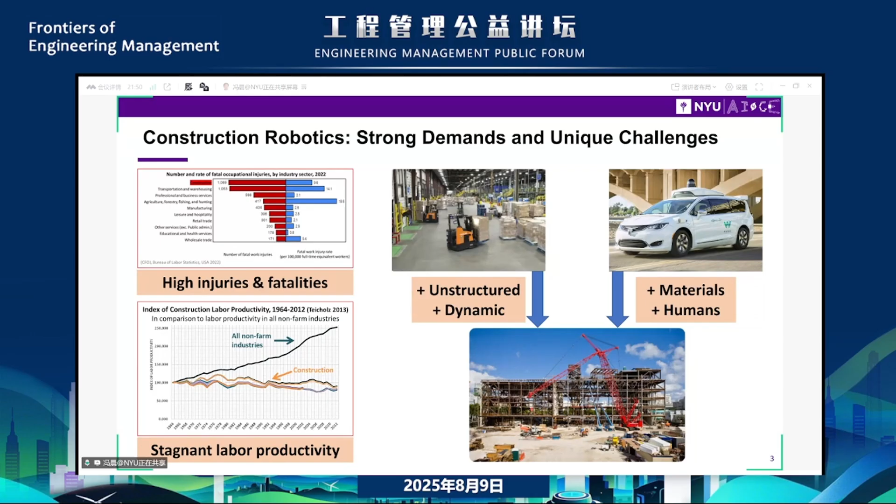So fundamental research is required for construction robots. We cannot just think about applying existing techniques in automation and robotics or machine learning or even AI to magically solve problems that we face in construction and engineering management. So let me illustrate some of the more specific technical challenges faced by construction folks when we try to bring automation and robotics onto the site. The first one is the so-called constantly changing job sites, right?

So this is a data set and a challenge hosted by the Stanford civil engineering department. They call this the Nothing Stands Still challenge. Basically they go to a construction job site and scan it in 3D in great detail almost every week. And then you notice nothing stands still in a construction site, right? Things change every week, if not every day. And this brings a lot of challenges to robotics, as we will discuss later.

Another thing specific to construction is that you typically face great difficulties in localizing and navigating agents, including autonomous equipment or even construction workers. Because a lot of the construction site, when it is being built, is featureless. It has many repetitive structures, and it is difficult for even humans to know where they are if they're not familiar with the site, especially when the site gets large and complicated.

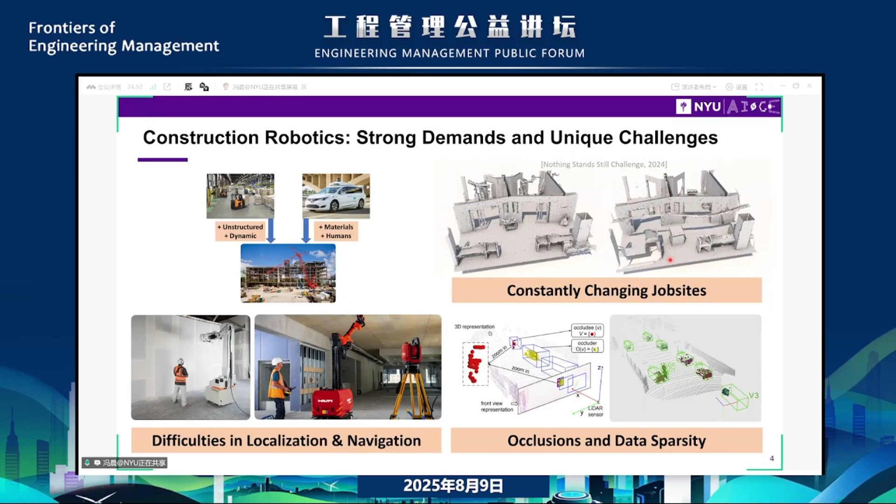So not to mention we want to use this technique to make the site more safe. Now, if you cannot address these technical challenges, you're actually bringing more danger into the construction site. So basically, we're saying construction vehicles are becoming autonomous these days. As you can see on the image here, this is not just happening in academia. It's happening in the field, in those heavy equipment manufacturers. Companies like Volvo, Boston Dynamics, different kinds of construction heavy equipment manufacturers. Even in China, I know companies like Xugong and Sany Zhonggong, they are all investing in this autonomous equipment technology, right?

So basically, in robotics terms, we can call these construction vehicles or equipment mobile manipulators. These mobile manipulators need to finish one task, regardless of the different specific construction jobs they have to perform. From a fundamental robotics perspective, they all need to perform simultaneous navigation and environment modification. So they need to move in order to perform their jobs. Unlike in manufacturing, you can rarely have a robotic arm that's fixed at one place and just does work waiting for things to be transported to the vicinity of that arm. The robot actually has to move around, and while moving around, they have to make modifications of their environment. So this is what we call a mobile manipulator in robotics.

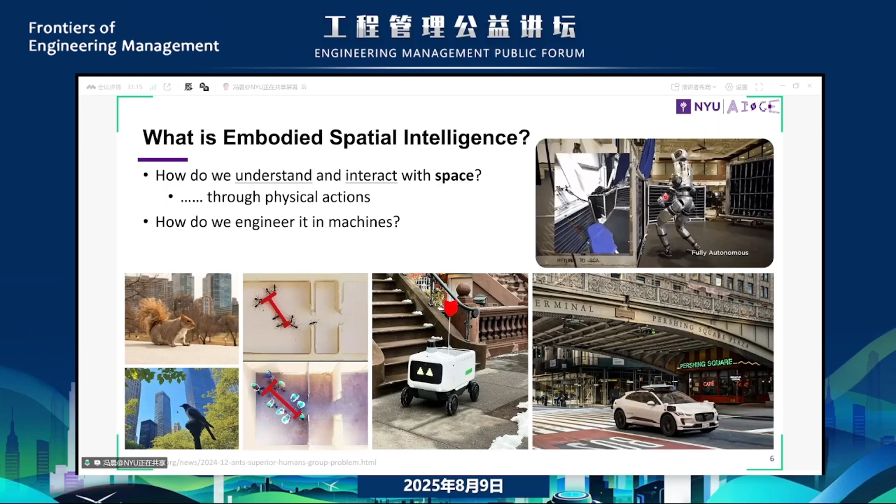Even humans need to try multiple times, and believe it or not, we are not more efficient than ants, right? So this is very interesting. But most importantly, to the interest of construction folks, we want to engineer those capabilities back in machines. So not only do we want to achieve autonomous vehicles or autonomous delivery systems, material handling systems, we want them also to be able to interact and move objects, work in factories and construction sites.

Now, talking about this, you probably will think, how far are we from engineering such intelligence, given all the great excitement and progress in the broad field of AI, artificial intelligence. Especially yesterday, GPT-5 was released, right? So here I want to quote from some famous experts that are known to the general public.

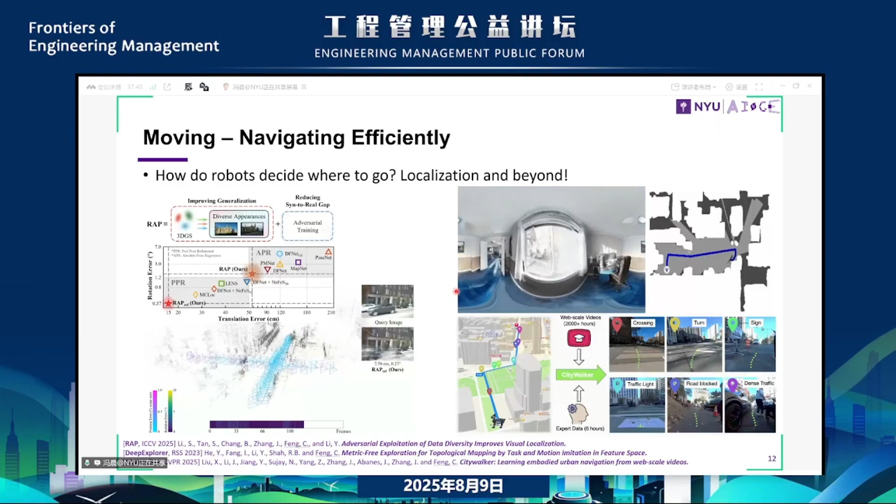The robot could be a self-driving car. It could also be an excavator on a job site, right? So they need to understand the surrounding situation. What is happening? Is there any signal that prevents me from doing certain actions? When can I move across this field in front of me, and when can I not? So all these are beyond localization. They're decision-making problems.

Of course, the things that are most interesting and most useful to construction folks are the making part, right? We actually need to enable these autonomous machines to build in the physical world, in addition to localizing and moving themselves like self-driving cars do. They actually need to move and do things and make things happen, right? So the animation is from the well-known WALL-E movie. I'm sure many of you or your kids have watched this before.

But I want to remind you of the amazing capability of Mother Nature. So here is a termite mound that people found in Africa, right? And I'm sure you can find similar structures in other parts of the world. So if you think about animal architects, this includes termites, but beyond termites, they can build structures. This is an amazing capability.

Even nowadays, after thousands of years of technology updates in construction, we still don't have an autonomous system that can do this kind of, quote unquote, simple task that even a termite or ant can do, right? So that means there are some theoretical challenges that fundamentally lie beneath these applications.

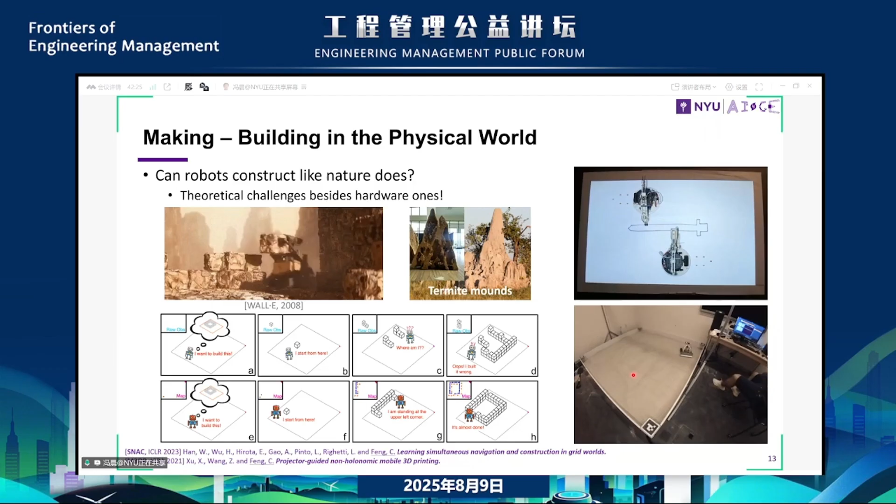On the bottom, we're showing construction like autonomous terrain grading experiments happening in our lab. This is an ongoing project, and we're hoping that researching these kinds of topics will one day enable robots to go to extraterrestrial conditions like the Moon or Mars to build bases for us. Right? So this is the making part.

And this is, of course, more than just the monkeys. We see these behaviors in ants, we see these behaviors in birds, many animals, right? So this inspires us to think, how can we enable autonomous agents like robots or construction equipment to work together so they can see and act better, right?

So my group has actually pioneered in this direction and developed a research subfield called co-perception, or collaborative or cooperative perception. Okay, so due to the lack of data on the construction side, we started by collaborating with researchers in transportation. So in transportation, we already have the possibility to either simulate or collect real-world multi-agent interaction data where you have vehicles near each other, all equipped with sensors, and they can talk and communicate with each other.

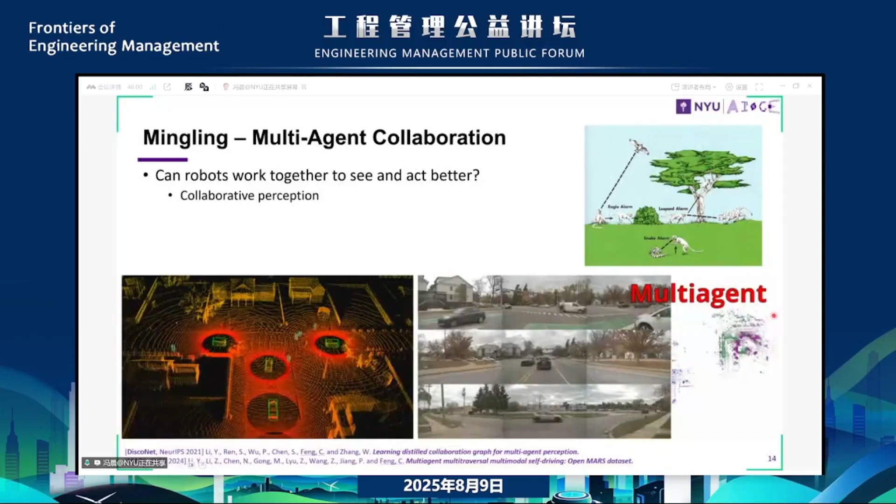So I know that we have about 40 minutes in terms of the presentation. So I actually have more details for any of these keywords. Depending on the audience interest, I can go deeper into any one of them. But maybe in the interest of time, because Professor Mao told me that I should finish this in about 40 minutes, so that we have... You don't worry about that. You can give more detail for this. Okay, yeah, not a problem. So then I will have a lot more time. I will still have about 20 minutes, so I can go into more details. And it really depends on the interest of the audience. I can go faster or slower in any one of those topics.

All right, so maybe let me talk about the mapping first. So for many colleagues working in engineering management, you're not unfamiliar with the term point cloud. Many times you actually need to go out to your job site and take your favorite terrestrial laser scanners, sit them on a tripod and let them scan the environment at different locations of the job site, and eventually you need to perform this registration task, which is what we call mapping or point cloud mapping.

And this is the mathematical summarization of the point cloud mapping problem. You don't really need to worry about it, I don't want to put you to sleep on a Saturday night, but what I want you to know is this problem is not unique to construction.

Even in autonomous driving, we need to solve the exact same problem where you have cars moving around in the city, and they scan the local geometry at their own pose at different times, and eventually they need to take all these scans together and build a map of the entire city. This is no different from a construction site point cloud registration problem, okay?

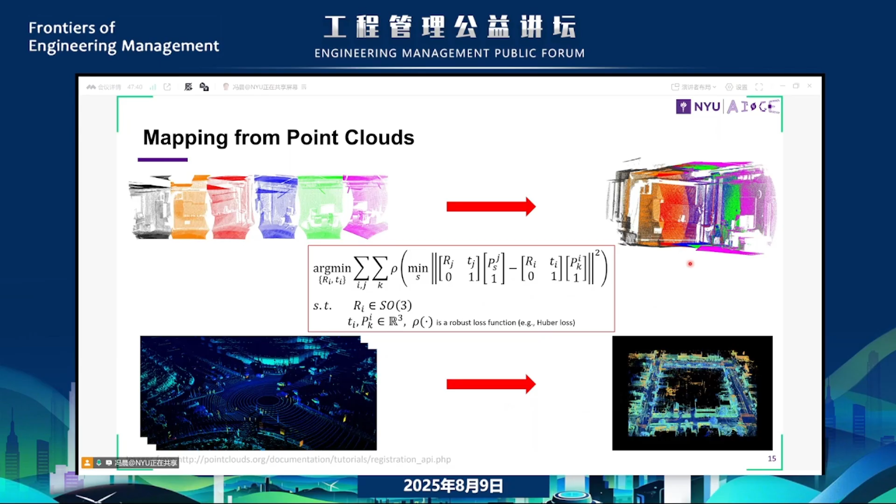So in the mapping part, my group has done some work that tries to make this process more efficient and less labor intensive, even though I know this field has grown rapidly, and with the latest service or software that you may get from companies like Leica or Trimble, the process is already much smoother than before. But still, if you're talking about scanning a site, giving all the data to the software and letting it automatically register all the point clouds without any human attendance, I believe we still cannot do that 100% nowadays. You may always run into issues here and there that require some human attendance, right?

So in order to make this whole thing as autonomous as possible, because again, as construction engineers or project managers, we don't really care about the fundamental technology. What we want is a fast scan and understanding of the current status of the job site, and to do any quantitative work as soon as possible.

So basically, we developed this work called DeepMapping2, which is one of the most accurate metric mapping systems, and it can take all the point clouds you scan, no matter whether this is done by an autonomous driving car or a job site scanning robot, and it will autonomously register them. As you see here, we're plotting the sensor pose in each frame, and this is a city-scale scan, and it will automatically register all the poses so that eventually they align very accurately.

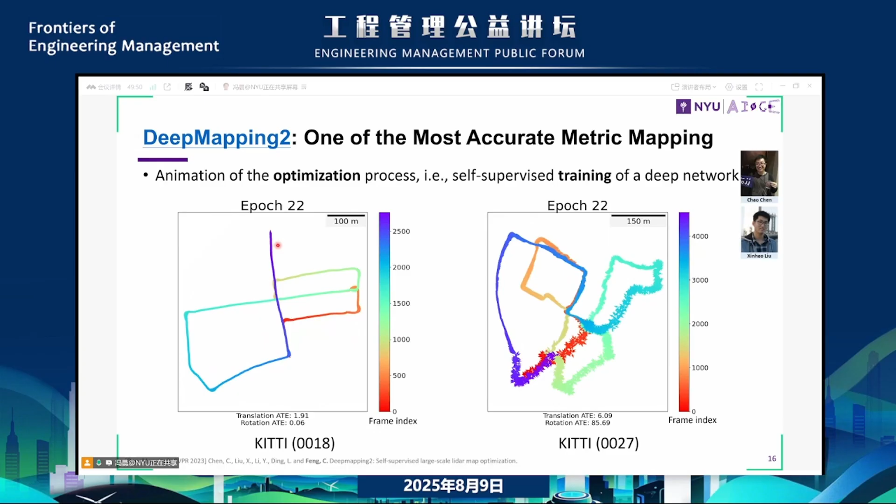And here, this sensor pose shows the structure of a street of a city, right? So you see from the beginning it is very noisy, and eventually the system converges without any human attendance at a city scale, autonomously. And here it shows both the trajectory of the sensor and the scanned laser points projected onto a 2D plane. And we show that our system is very close to the ground truth, the high-accuracy ground truth that even requires some human attendance to build.

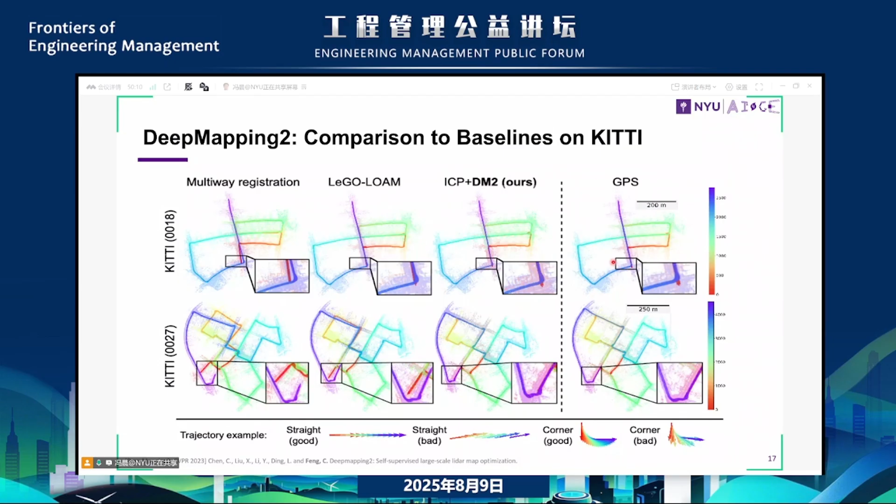So in the interest of time, I will skip the technical details. Again, I don't want to put you to sleep on a Saturday evening.

So the important thing is we developed an AI system, or basically a deep neural network, and we make this problem equivalent to training that deep neural network. So by training that deep neural network, the problem gets solved. So we don't even need to deploy this trained neural network later. Just training the network itself is equivalent to the mapping problem. And then we can leverage all the good techniques in AI to make this problem autonomous.

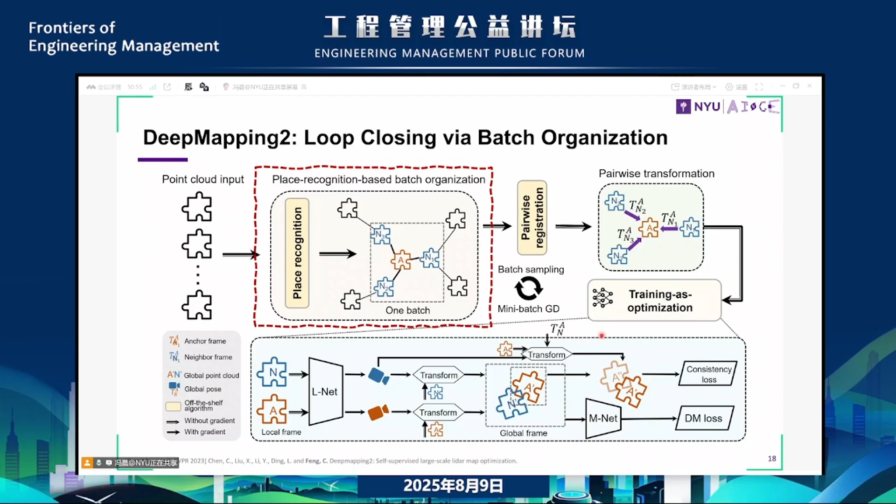Okay? So we can do mapping not only from point clouds, but also from images. This is typically lower cost because laser scanners are still pretty expensive, and they're often bulky and heavy. If you have a pocket camera like your cell phone or a 360 camera, you can very easily walk around the job site, and then you wonder if you can build a map from those images. This is a very well-known problem called the structure from motion problem in computer vision and robotics. In robotics, we call this visual SLAM.

So there are different ways people perform traditional SFM, or more recently, people use neural networks to do learning-based metric mapping or learning-based topological mapping. And here, for those who have the mind of a theoretician, you may be interested in this very abstract mathematical form that summarizes all the mapping-from-images problems. But for practitioners, here is something that may be of interest to you.

This is a work that we published 2 years ago at CVPR, one of the top AI conferences, named VoxFormer, which is a camera-based 3D semantic scene completion problem. It was originally popularized by the company Tesla in the year 2022. And basically what this problem is, when we have a camera moving in the environment, we want to develop some kind of end-to-end learning-based AI system that will generate this kind of

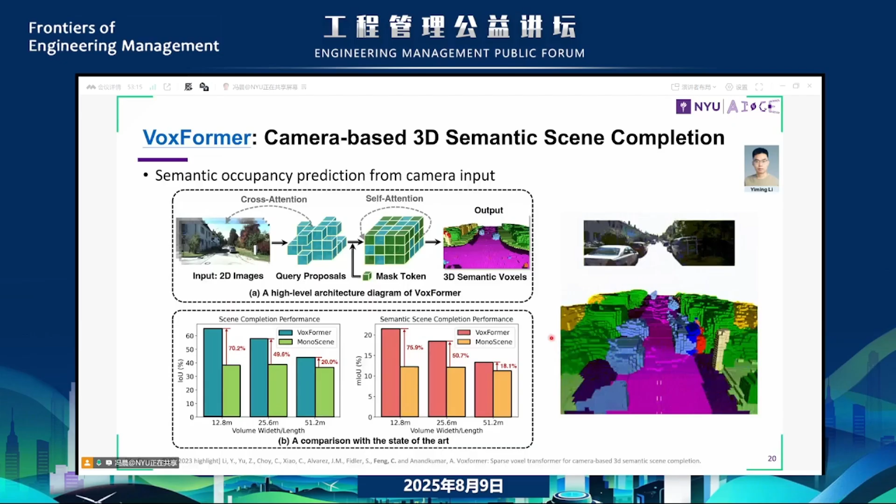So this is a very interesting and challenging problem, and we were able to achieve the SOTA at that time by developing a novel transformer-based neural network architecture that generates results from this single-view image that match very closely to the ground truth data, whereas the previous baselines all make more mistakes. Okay.

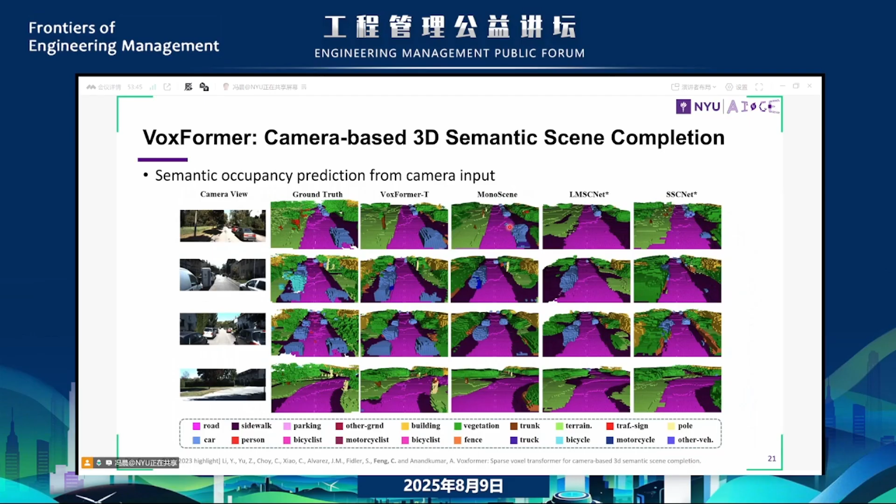So we can also go beyond metric mapping, as I mentioned. The multi-view scene graph work that our group published last year is a representation of the so-called topological scene representation. And the reason that we want to develop methods in addition to metric mapping is the metric mapping.

For those of you who have used terrestrial laser scanners, you would know if the scene changed during your scan, it can create a lot of problems, not only for the registration of multiple point cloud scans, but also problems of recognition, like later on you need to figure out where this thing is, which thing happened first and last, and how to register a new scan into the existing scan where the scene has already changed significantly.

So if we move beyond the metric mapping requirement, which requires us to build a global map that is metrically accurate everywhere, we can relax that condition by saying we just need to build a graph that preserves the topological connectivity information among those images or the objects in those images. Then we can more quickly and easily maintain such a graph even if there are changes in the environment.

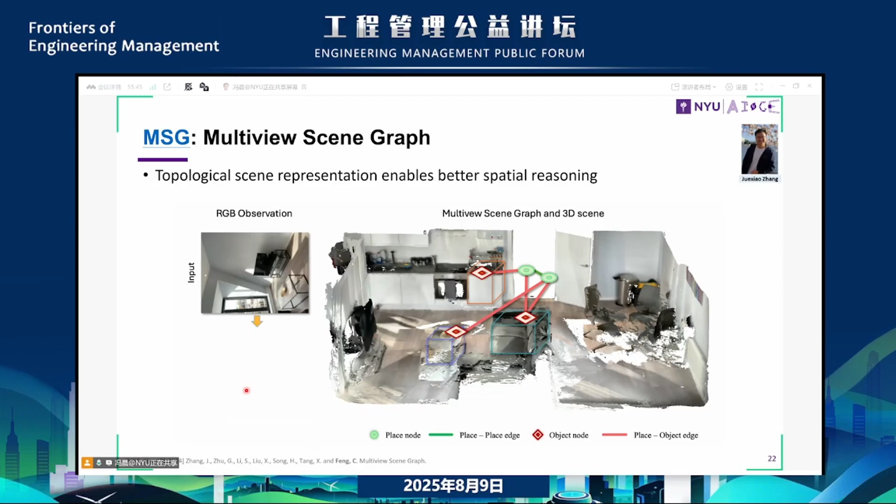Because if there are any changes in the environment, we just need to replace that image, remove the corresponding object node, and replace it with the new image and the new object inside it, right? So this is the fundamental idea of the topological representation beyond metric mapping. And this kind of representation will be super useful for tasks like asset management. For those of you who have managed mega projects, you would know how challenging it could be if the job site's assets are not properly managed.

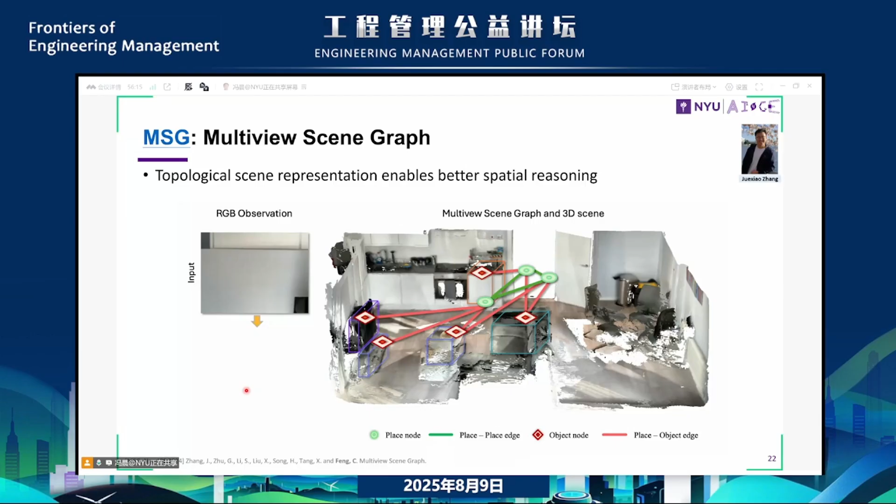You would constantly face problems of the need of finding a particular useful and unique asset, where it is and who used it last. And we believe this kind of topological mapping is a very flexible and robust way of addressing that problem. And here are just some of the applications that can be enabled by this kind of topological map.

For example, the embodied question answering application of the topological maps is a great example of resolving the asset management challenge. When you build such a topological map of the environment from the surveillance video you have of the site, then, just like how you interact with GPT, you can ask questions to such a model. Where is which object? What's the last time you saw that object?

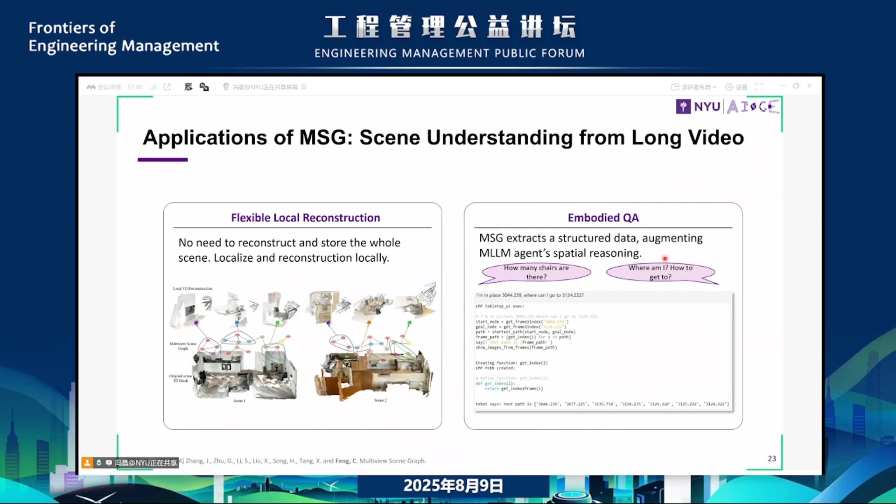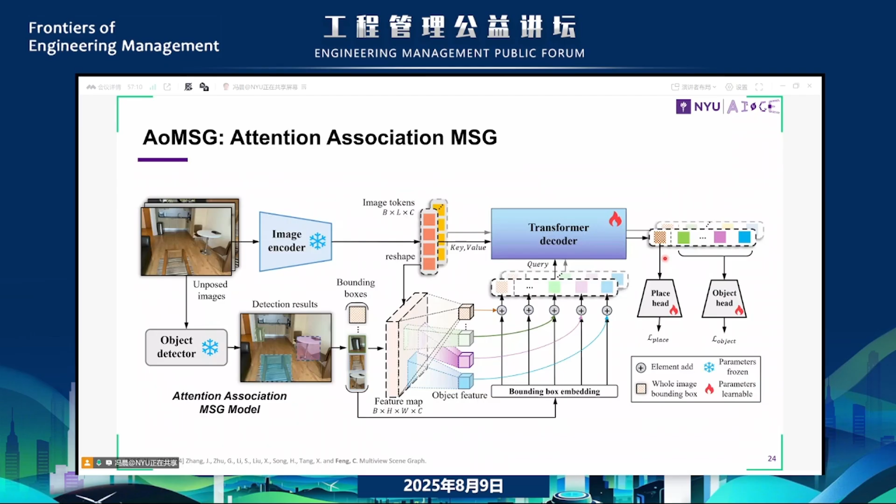I will skip the technical details of how we implement such an AI system. But I want to move on to the next keyword, moving, with a bit more detail. We want to teach a robot how to move, or basically how to navigate an environment. One example that can be useful for construction, especially in the operational phase, is the exploration problem: in a new environment the robot has never been to before, how do you autonomously navigate this robot so that it can explore every single aspect of this environment without human attendance?

Again, if a building manager, when first taking charge of a building, can just send a robot dog that autonomously goes everywhere, then they can leverage the information collected by this robot to build the maps we talked about before. But before that, you have to solve the problem of how to tell the robot to go to all the places in this building. Because remember, this is a new place the robot has never been to, and you don't have a map, right?

So maybe you have a BIM, but the BIM never has the actual condition. They're always as designed. The as-built BIM, as far as I know, is still far from being implemented in the real world. And even if implemented, they don't have the real-world conditions, the real-world texture, real-world details. So it will still be good for a robot to be able to autonomously navigate and explore such an environment without missing any key places.

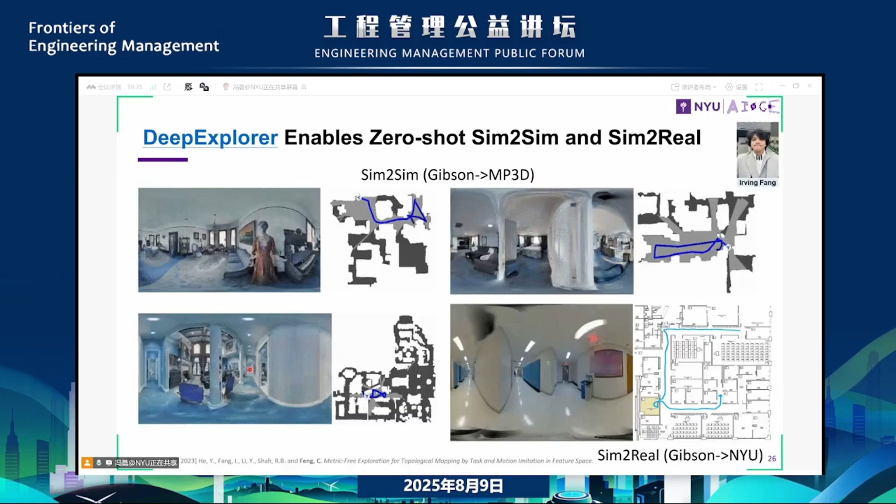This slide shows something called DeepExplorer that we published two years ago at a top robotics conference called RSS, Robotics: Science and Systems, where we enable this robot equipped with only one 360 camera. These are equirectangular images captured by a 360 camera, so you get the surround view very easily with only this one sensor, without relying on more complicated sensors like LiDAR.

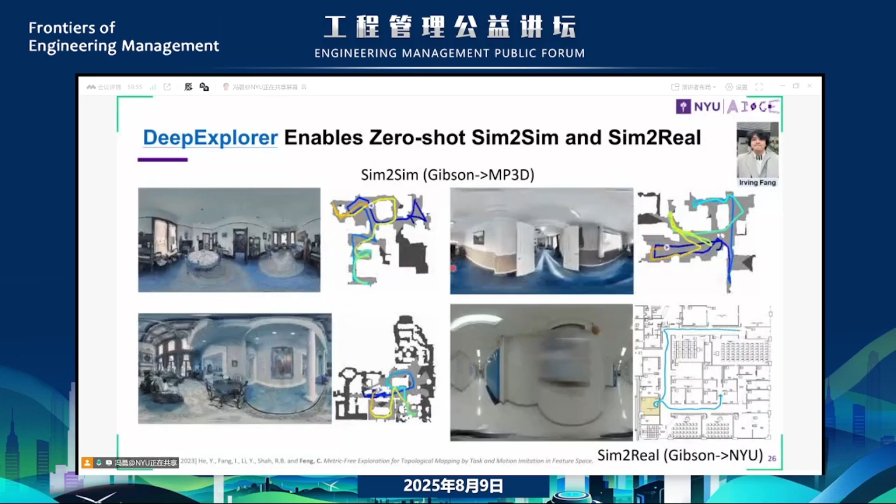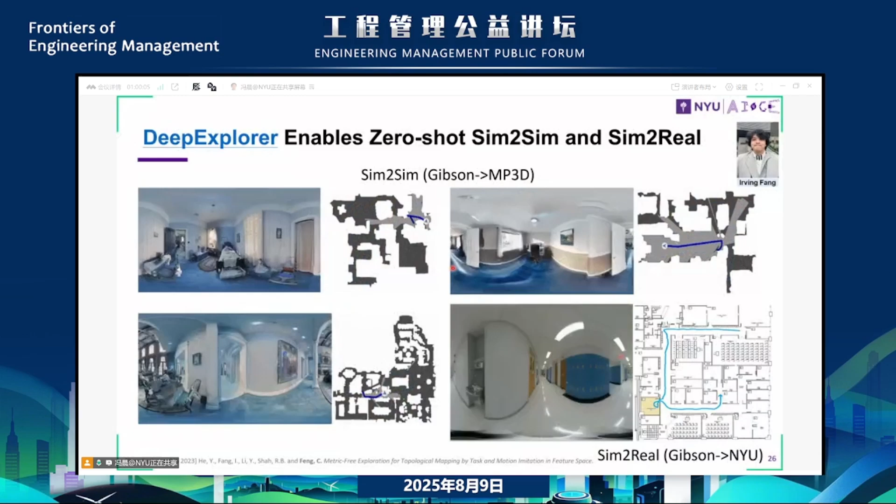We developed a system that, just like humans do, can autonomously navigate an environment by memorizing which places it has already visited. Therefore it doesn't require much revisiting, so it can spend more time on the unexplored, unfamiliar regions. We were able to train this whole system in a simulated environment and then deploy it in a completely different real-world environment. In this animation, you're seeing an actual real-world deployment in our university building.

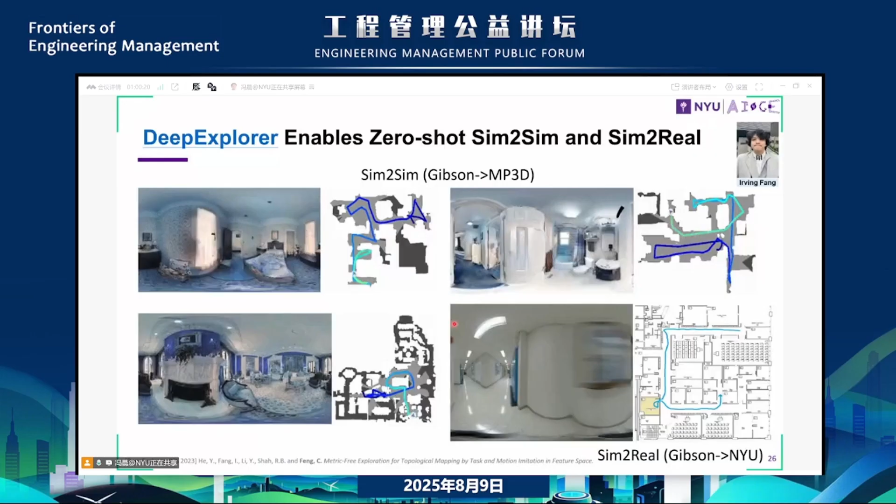I will again skip the technical details of how we achieve this. The key is to develop a neural network architecture that addresses both the high-level task planning and the low-level motion planning through imitation learning, so that it imitates oracle experts to perform this task and eventually is able to autonomously explore the environment.

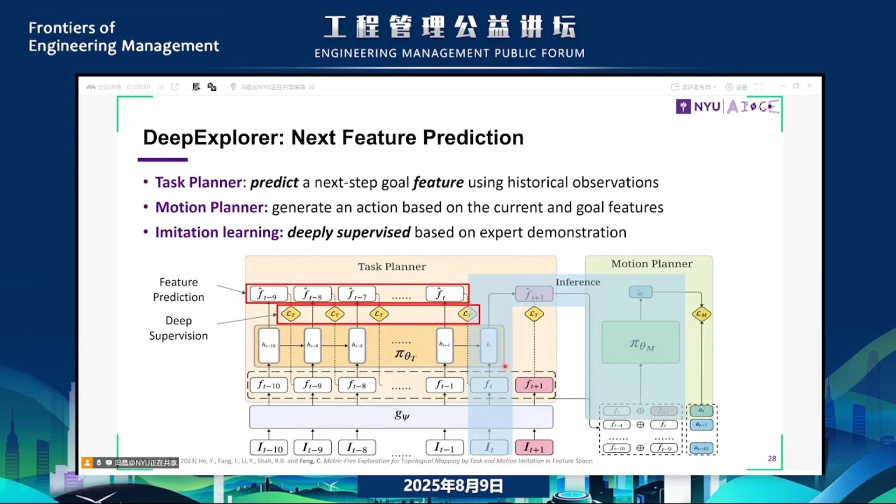I want to highlight a recent work called CityWalker from my group this year, published at CVPR, using web-scale videos for urban navigation. We believe if we can resolve urban navigation problems, such as navigating a robot dog from NYU to Columbia without any human attendance, relying only on information available to a general human being, like a cell phone and Google Maps, then it is easier for us to bring a robot to a construction job site, because many problems in urban navigation are similar to a construction site. You face a dynamic environment, dense traffic, different construction conditions, right?

But the key to such embodied AI is always the data. Where do you get the data? We never had large enough robot dog navigation recordings available to researchers or to anyone in the company.

And what we are able to do is we say we can leverage the thousands of hours of videos people posted on YouTube that include either humans holding a camera walking in different kinds of cities, or driving in different kinds of cities. So we curate over 2,000 hours of YouTube videos that show very different, very dynamic situations at different seasons and weather conditions. And then we're able to develop scalable AI systems that can consume this data and learn implicitly all the rules that humans follow either walking or driving in those environments.

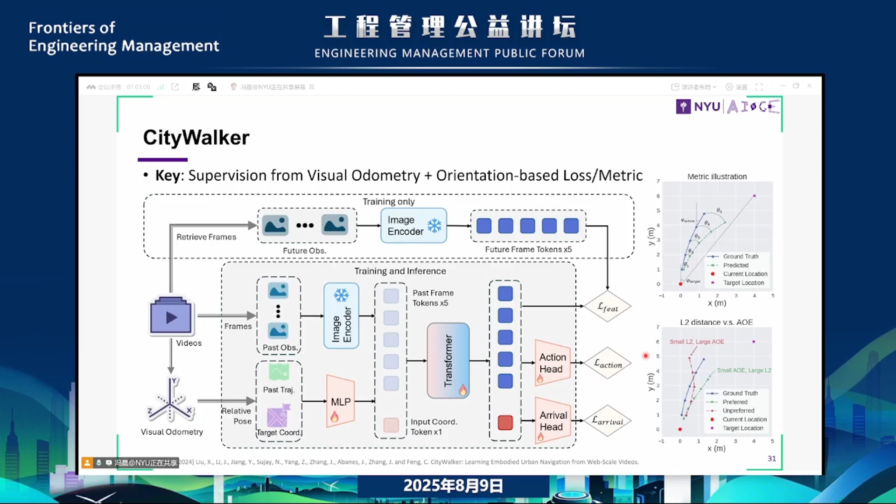And then, very interestingly, we're able to discover the scaling law. So without changing the neural network architecture, by just increasing the training data from a couple hundred hours to a couple thousand hours, we notice the error decrease, or basically performance increase, which shows this scaling law. And we also show that by including different modalities, we also improve the performance. So even if your task is to walk, if you have watched enough driving videos, it will help you walk as well. So these are all very interesting discoveries.

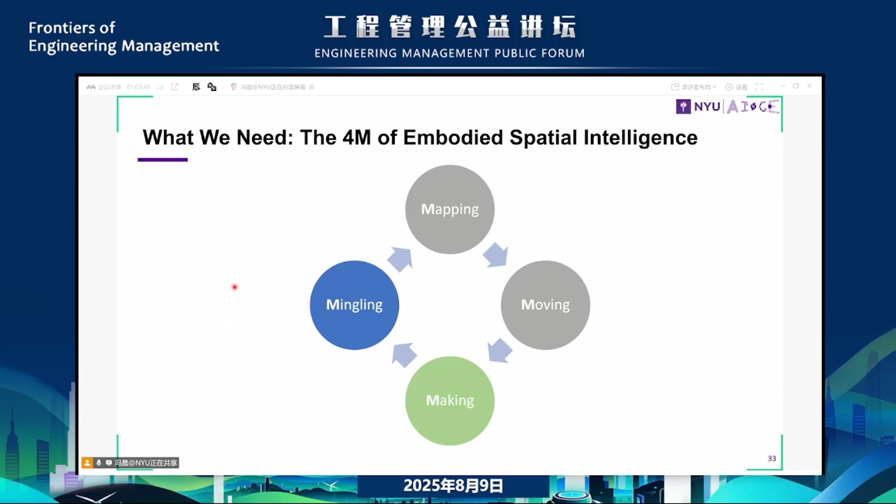So let me see. I want to skip some of these later slides. This really shows our work on using AI to teach robots how to do things without requiring the human to ever know robot programming. So we essentially use a vision language model to translate a video into robot code that makes robot programming easier. And we think this is important for industries like construction and manufacturing, so that we don't really require robotics experts to program things for us.

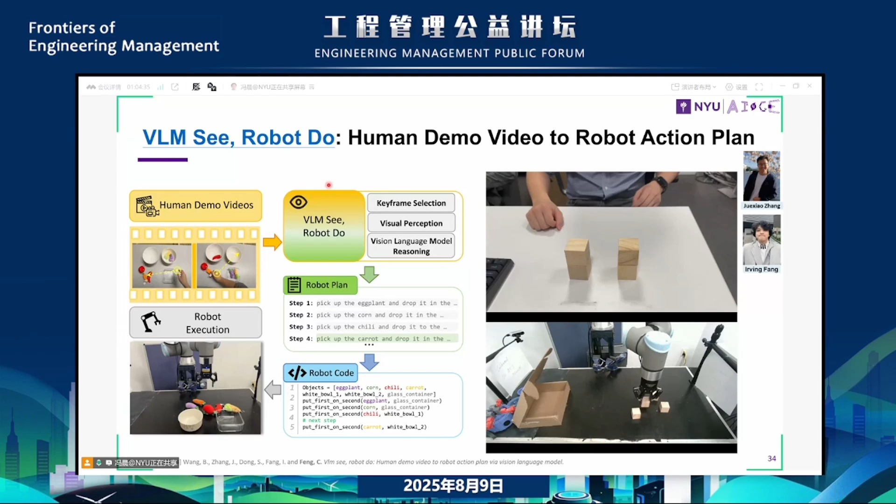So here we demonstrate a capability through our own dataset and AI trained on that dataset. We're able to enable such a robot arm to collaborate with this human, predicting where the human's hand is reaching within 1 second in advance in this pick and place operation. Right. So this 1 second advance is very, very important because robots need time to execute their actions. And we need to do this in a proactive manner instead of a passive observation manner. So we're able to do this with reasonable accuracy that can enable better human-robot collaboration.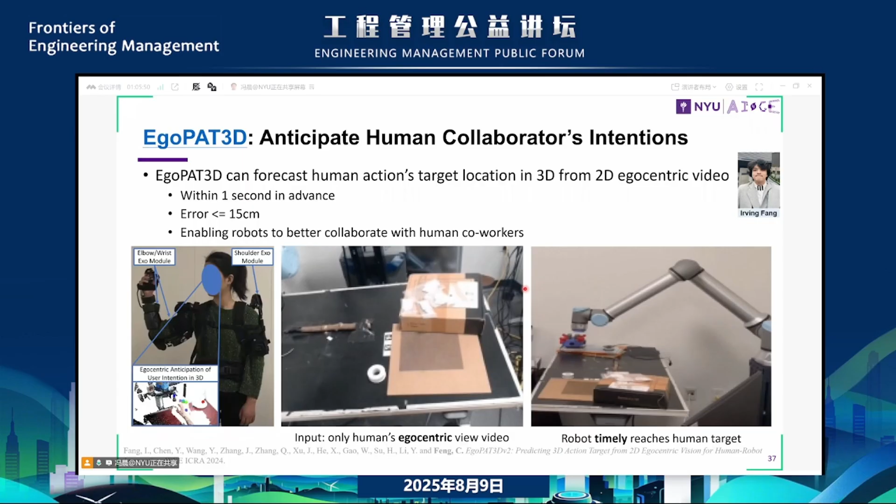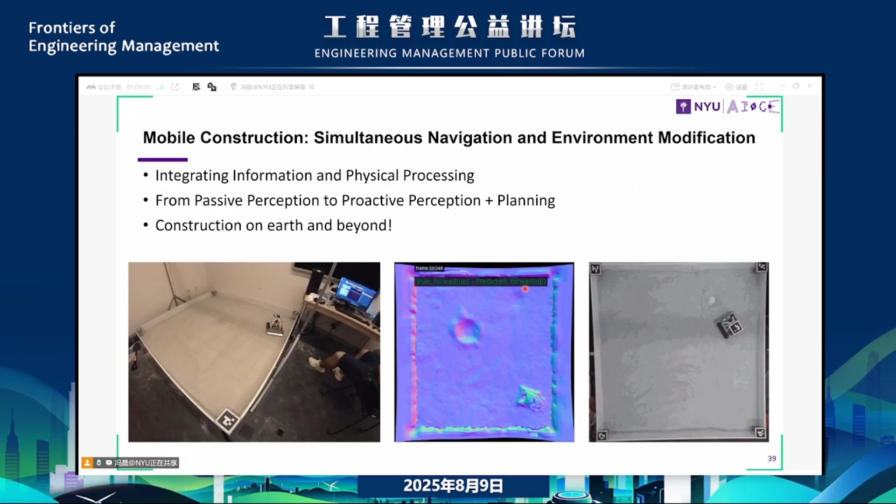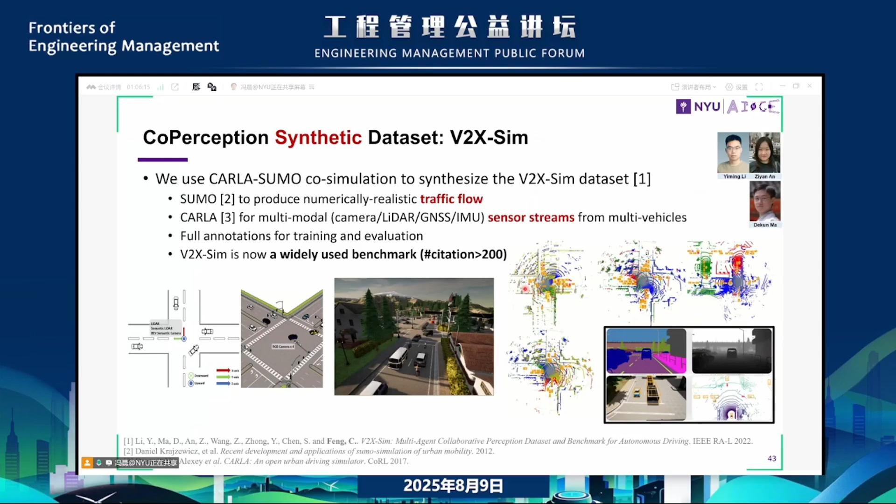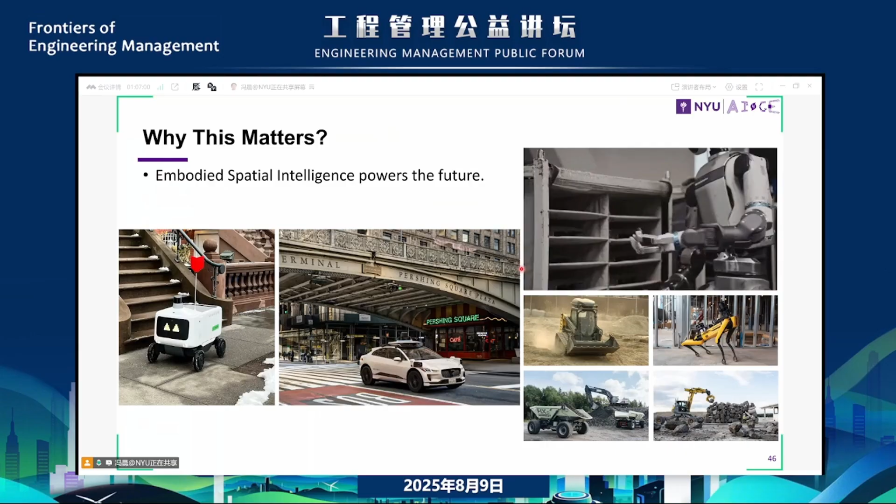Well, we believe embodied spatial intelligence powers the future. It's very, very important for construction automation and robotics to really work instead of building ad hoc solutions. The theoretical or fundamental science needs to be done in order to enable that future. And here I show one example, which is translational research, basically a startup spin-off from my lab that exemplifies this vision. So this is a student startup company called Building Diagnostic Robotics.

We build this robotic system that takes all kinds of sensors like LiDAR, camera, radar, to scan building rooftops like a Roomba, as you see in this video. And then it is able to produce a line-by-line scan with AI-based classification of moisture damage on the rooftop. Of course, you can also repurpose this for rebar detection, which is another service that this company is offering right now.

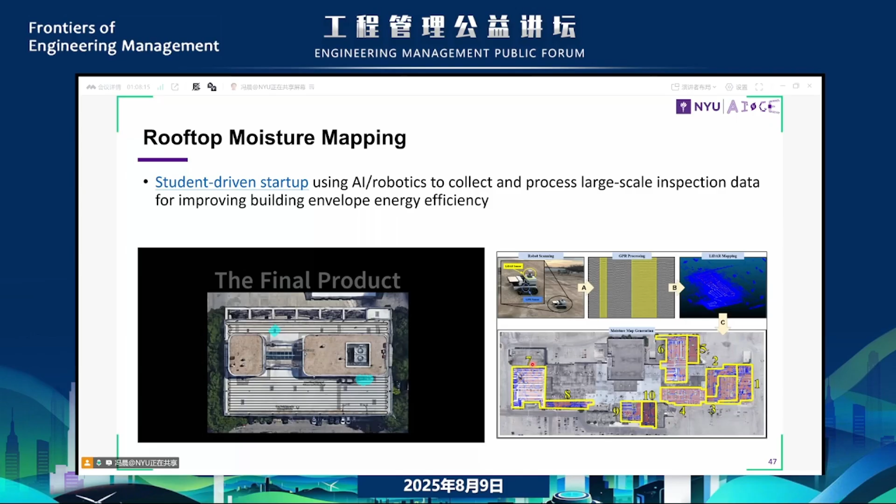And the cool thing is this whole thing is done very efficiently. Within 24 or 48 hours of a scan, we can produce the entire report for engineers. And the scanning itself is very efficient. Typically within 1 or 2 hours, depending on the size of a commercial building's rooftop, we can finish the scan fully autonomously, right? And then you get this kind of rooftop moisture map.